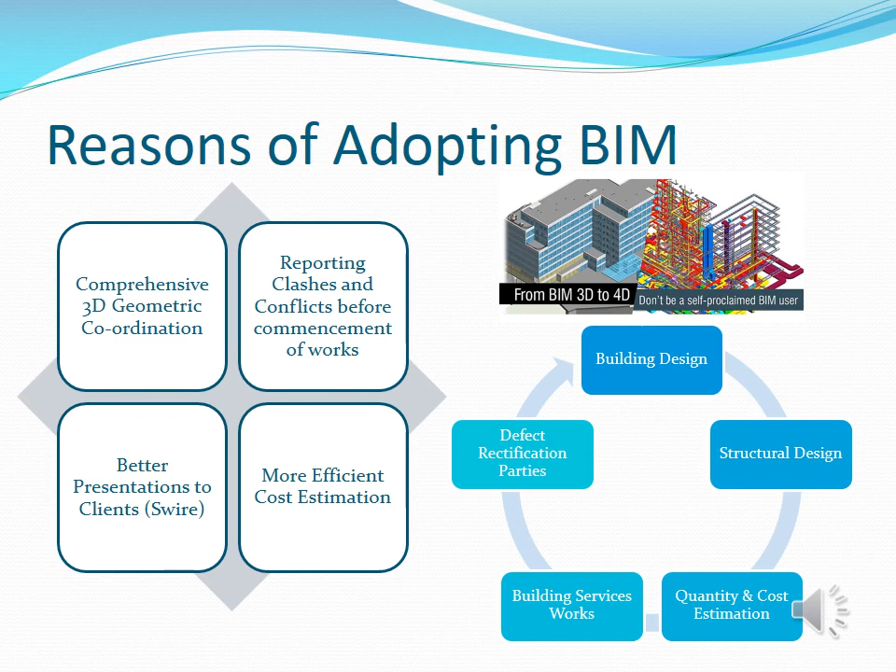Time is always the most important element of a construction project, and thanks to BIM, it saved much time in this project. This mighty 70-story building project just took 3 years to complete, which was a huge step up for the construction industry in Hong Kong. The scope of the project is summarized here and will be further elaborated by Fai.

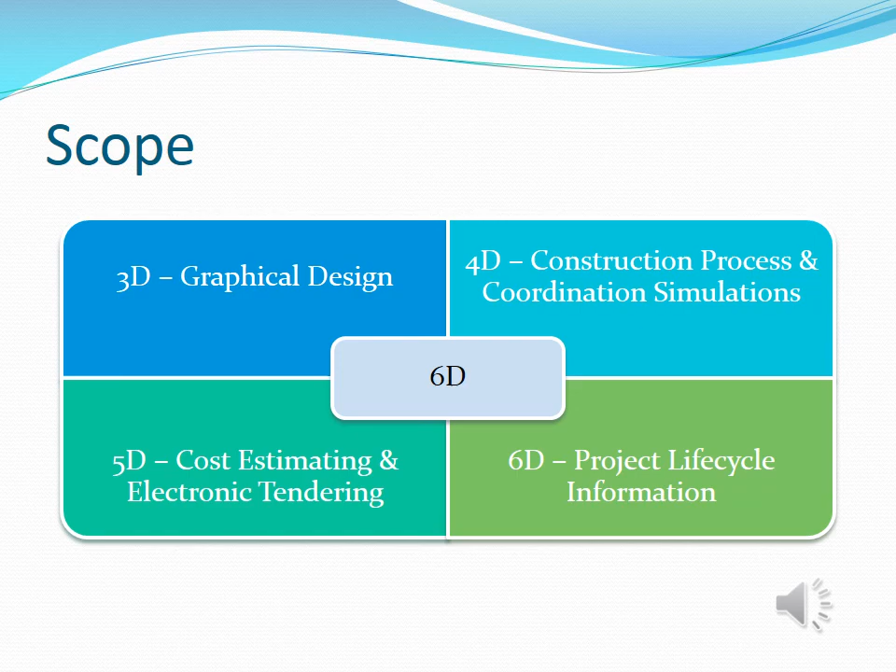In the next session, I would like to talk about the application of BIM in One Island East. In the 3D models, the client Swire Properties has adopted the digital project software from the BIM consultants. It comprises two functions, product modeling and process modeling. It also allows clash management, and it integrates various CAD drawings, for example MEP drawings and structural drawings.

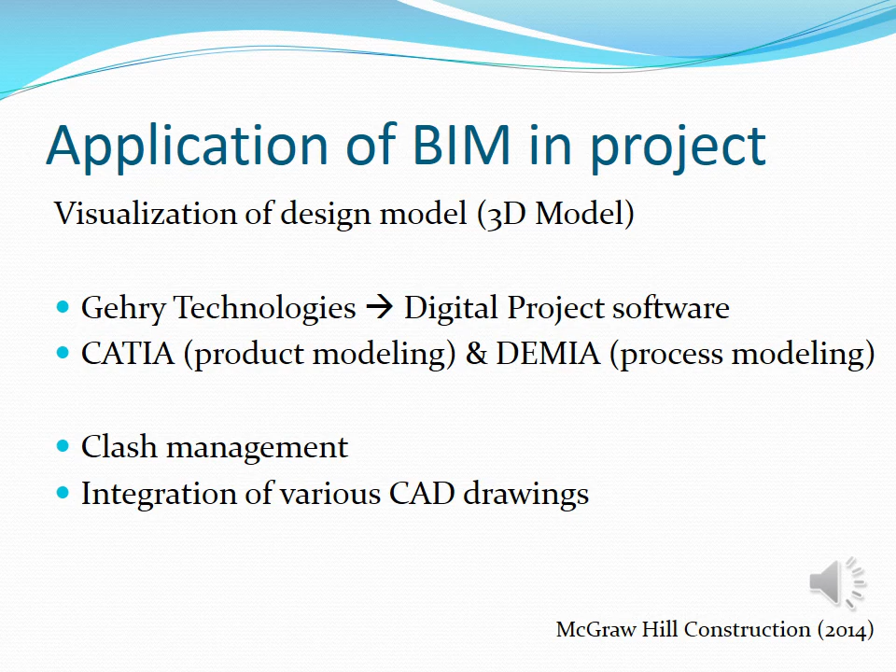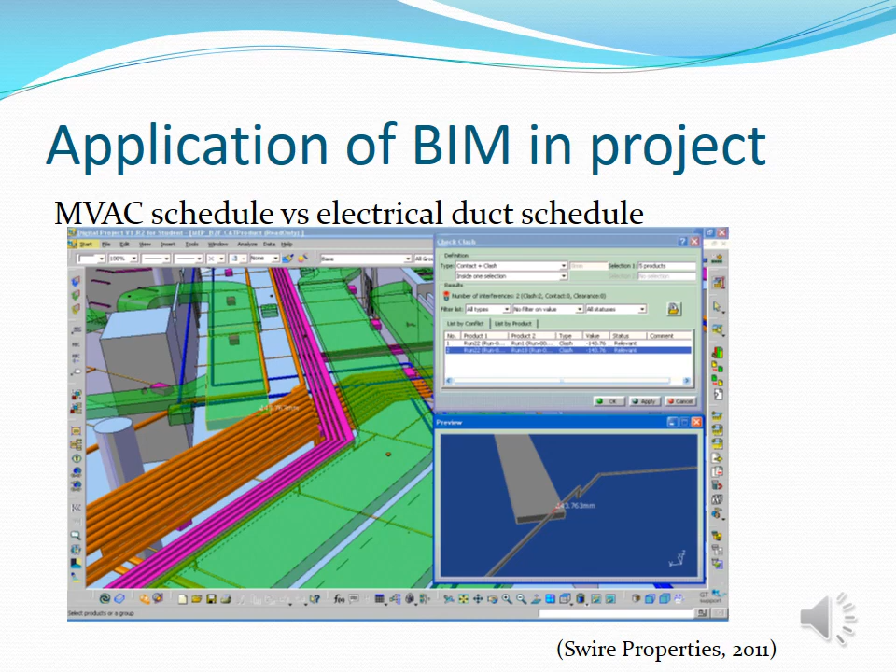Here we can see the clash was detected from the 3D models. And this is another example of clash management.

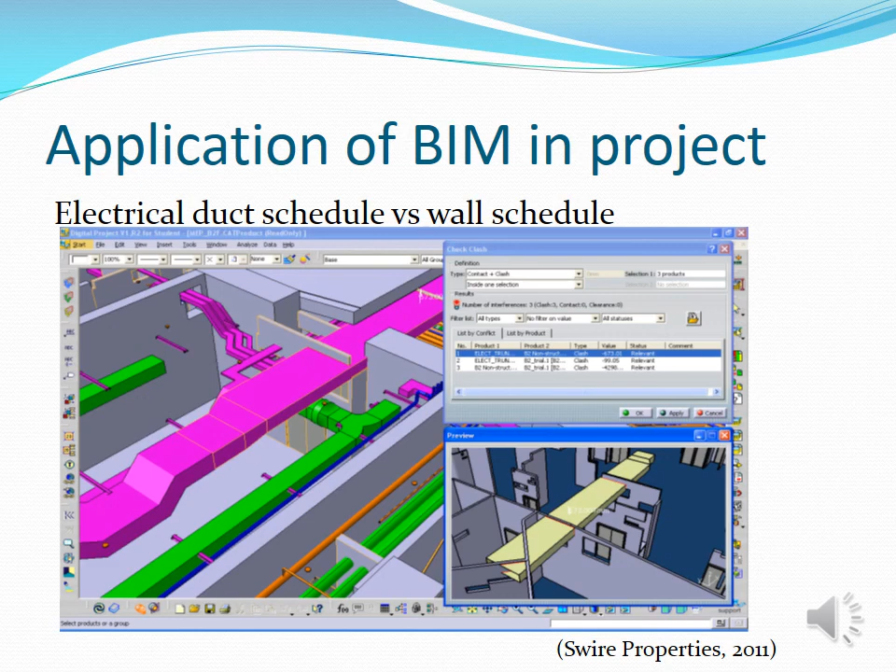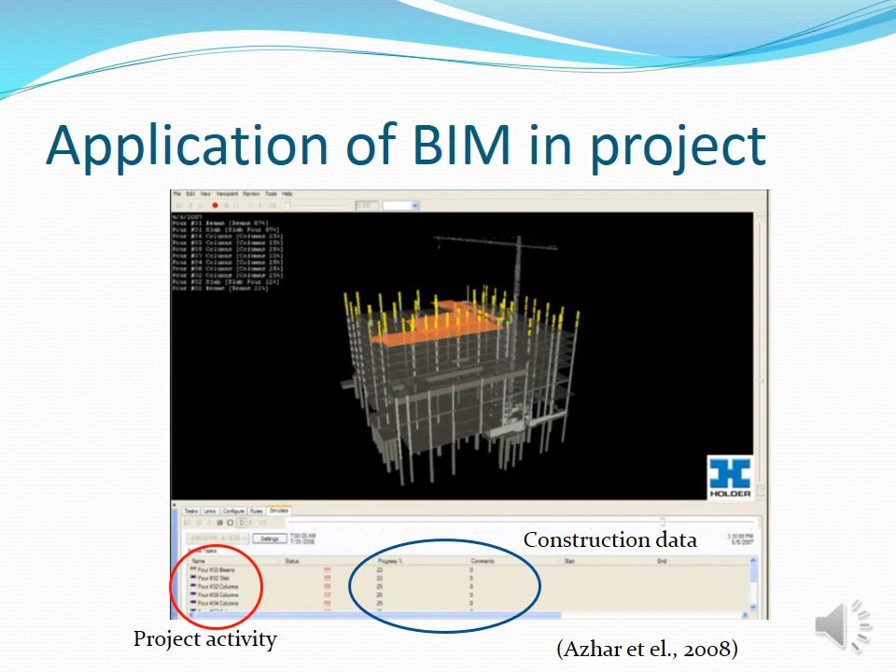In this case, Microsoft Project was used for project scheduling. The tree-shaped breakdown structure was built in the 3D models, and Gammon used the tree-shaped breakdown structure to handle and update the BIM model data. By using BIM, the progress of project activity can easily be maintained by inputting construction data into the BIM models. Using BIM, construction sequences can be scheduled and workflow clashes can be avoided. From the figure, we can see the workflow was planned and scheduled, for example, from formwork to concreting.

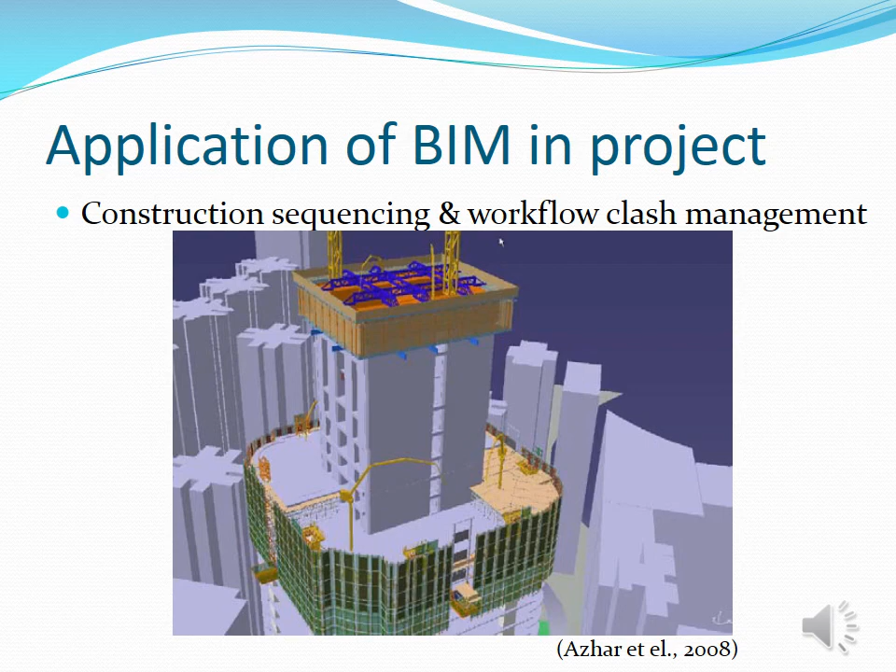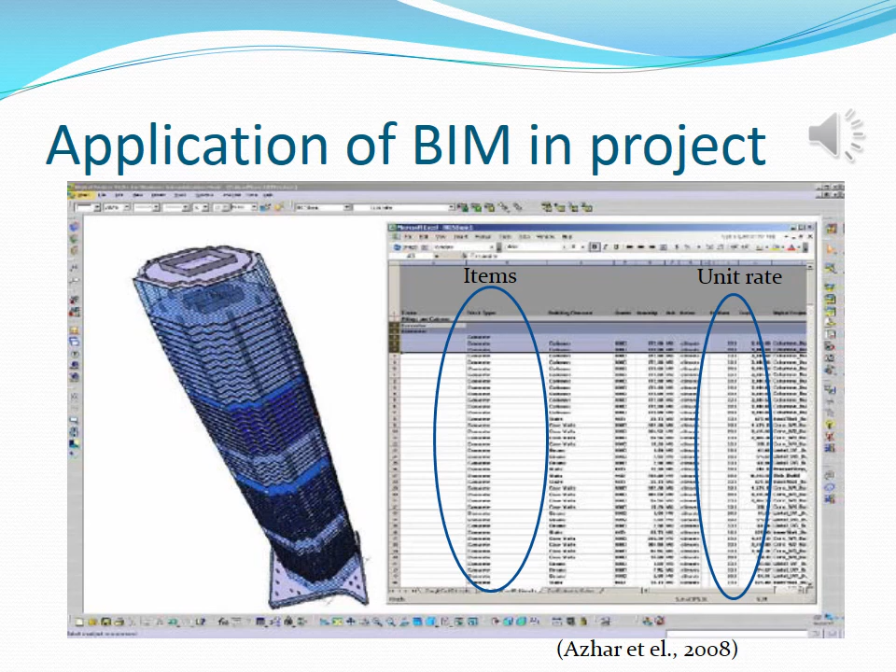Digital project was used in automated costing for generating the bills of quantity and also the variation orders. The quantity was provided by the design team so that the BQ and VO can be generated quicker, so smoother project cash flow can be achieved by quicker claims from the clients. The BQ and VO can be quickly generated by simply inputting the unit rate. It helps the tendering process to be smoother and faster.

After construction completion, the BIM model will be transferred to Swire again for facilities management. The BIM model will be used in operation and maintenance, and also RMAA works, for example to schedule plant maintenance.

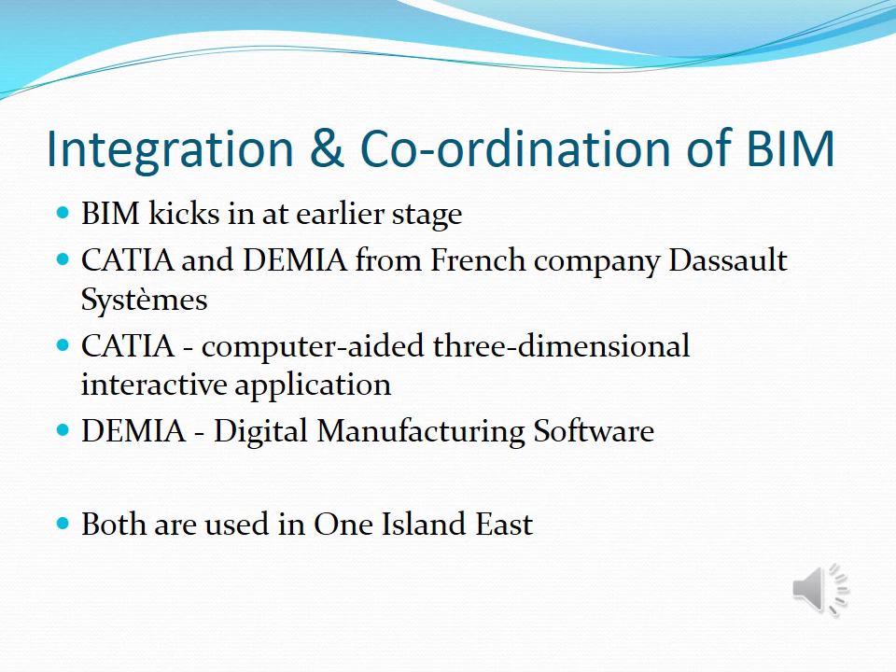For integration and coordination of BIM, BIM kicks in at an early stage, in which two programs from the same French company are used. The decision to adopt BIM is made after reaching the schematic stage of design, in which, in this project, all elements including plumbing system and electrical system are all used in BIM. Also, Microsoft Project and Primavera are both used in this project.

The org chart of One Island East is a bit different from an ordinary project, in which the element of BIM is added into the org chart. For a traditional project, if CAD is used, CAD can only have a limited scope of work, so CAD cannot be added into the org chart. But for One Island East, there is a more important position for BIM, and direct participation is achieved, so the org chart will include BIM as an element.

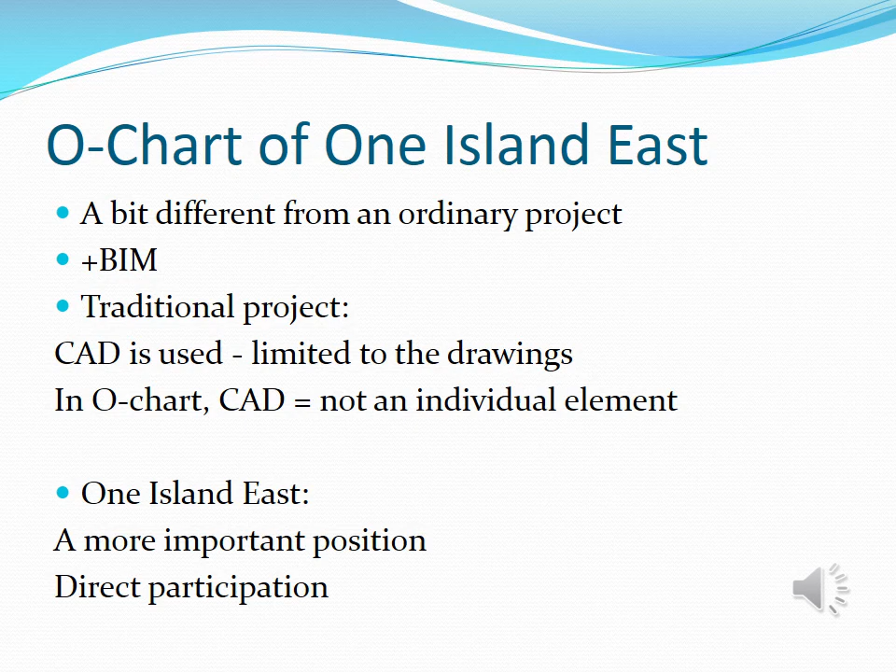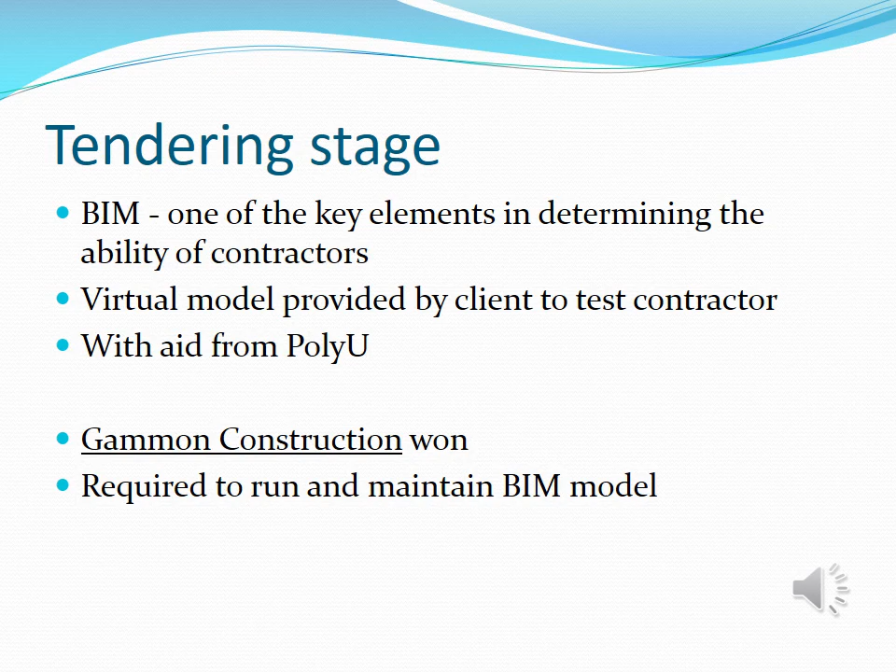In the tendering stage, BIM is regarded as one of the key elements in determining the ability of contractors, in which virtual models were provided by the client to test the ability of contractors with aid from PolyU. Finally, Gammon Construction won the tender, and Gammon was required to run and maintain the BIM model throughout the whole project.

In the construction stage, the use of BIM enables the project manager to coordinate the working sequence more effectively, for example the arrangement of subcontractors. Also, BIM can foresee what should be done next, such as the movement of construction materials or the movement of labor, which can all be visualized in BIM.

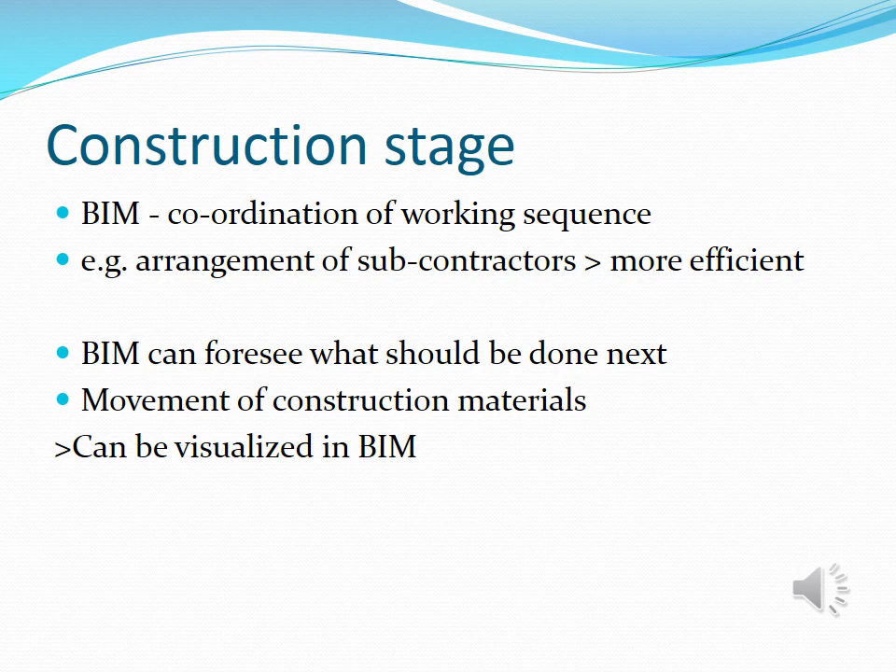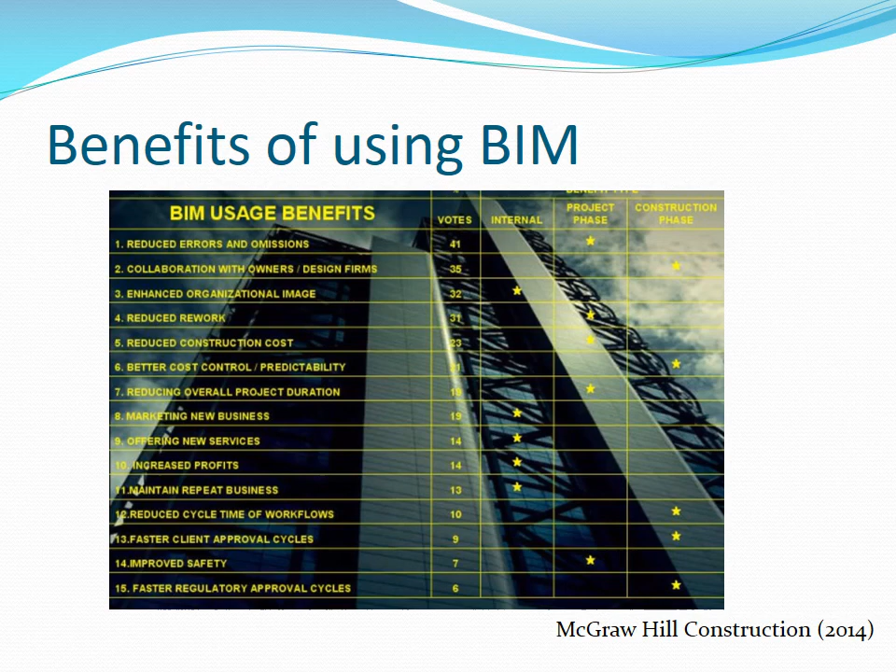Talk about the benefit of using BIM. McGraw-Hill Construction conducted a survey about the benefits of using BIM, as selected by construction companies. The advantage of BIM is to reduce error, and clash detection can prevent overlap of elements. The contractor can avoid making mistakes in the construction stage, and a lot of manpower and materials can be saved in terms of time and money.

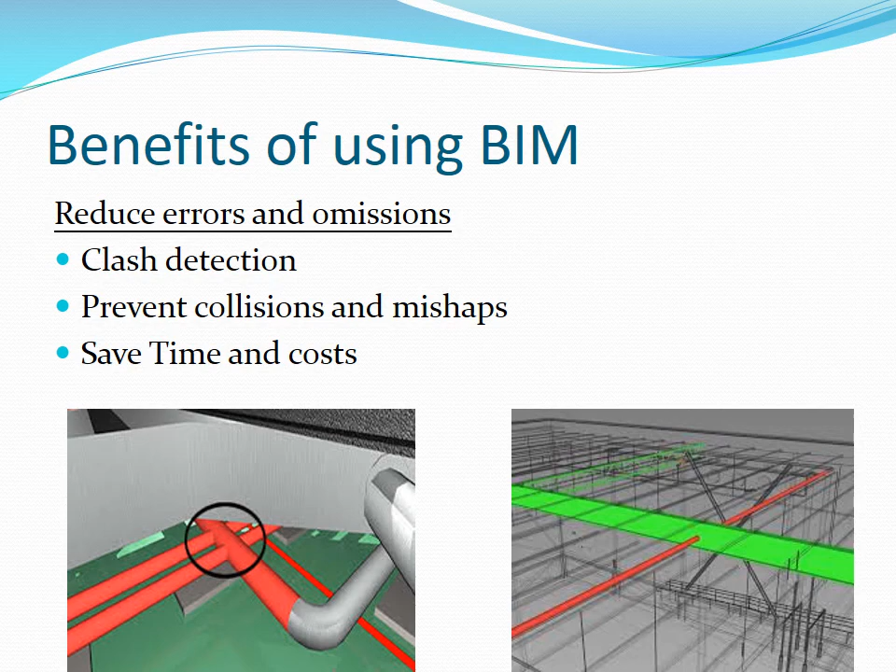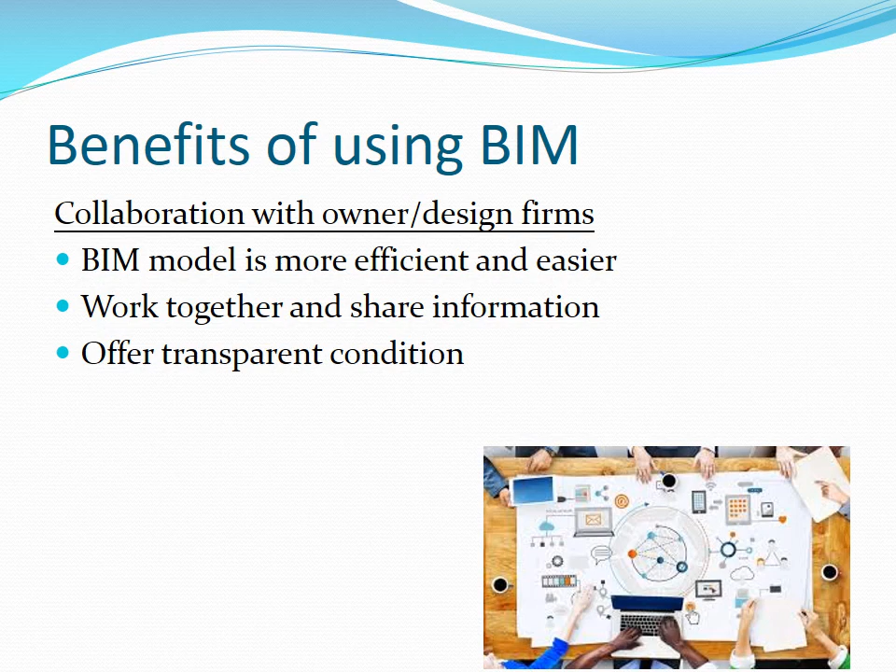It can also improve cooperation with owners and design firms. The BIM model is much easier compared with traditional drawing. All parties are recommended to work together and share information with each other, and everyone can contribute to the development of the design.

It can enhance the organizational image. It is a new tool, and using BIM seems more professional. The image enhancement should clearly lead to more jobs, which means economic benefit.

Let's talk about the limitations and challenges of using BIM. According to the NBS National BIM report, it mentions the most affected challenges and limitations of why companies did not use BIM. The companies lack in-house expertise, related to project size, skill demands, and no skillful manpower in the market.

The second limitation is that the demand from clients was not enough. Although the government is trying to use BIM in public projects, some clients did not have enough budget to use BIM, such as for A&A works.

Some interviewees mentioned that there is not enough training in the market, which is the same in Hong Kong. Only a few degree programs and courses, such as at IVE, have provided BIM subjects and lessons. The cost is also one of the most difficult reasons, since BIM needs to show a profit, and the cost of using BIM includes the software, training, and time.

To further promote the use of BIM in the construction industry, our team has the following suggestions. The first is government leadership and support for the technology. The government has the responsibility of promoting new policy and technology, and BIM in the construction industry is no exception.